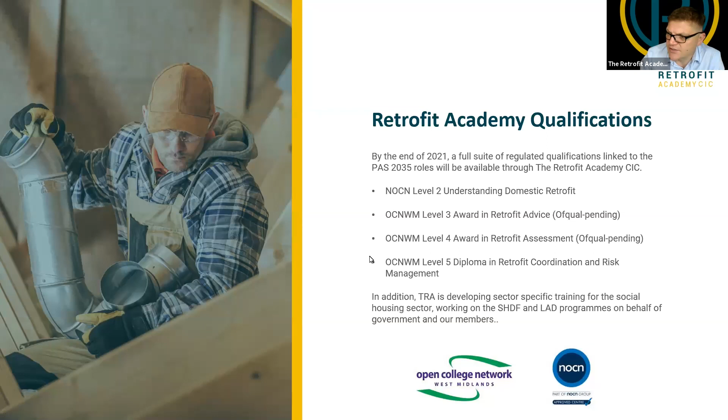So a lot more training. In addition to that, we're working very closely with the SHDF and LADS programs, doing some very interesting projects on behalf of both government and industry. So lots and lots going on.

In terms of funding opportunities at the minute, I'm hoping to have some big news in the next week or so. Our friends in government have been a little slow on something called the Community Renewal Fund, which we've had provisional approval on, but we're waiting for the Chancellor's green light in next Wednesday's autumn statement. I hope to have some really big news following on from that.

Until then, the funding we have available is in Manchester - funding from the Greater Manchester Combined Authority, but the funding restrictions are fairly loose on this one. If you're based in the Manchester area, you'll be fine. If you've been involved in projects in Manchester in the last few years, you're likely to be fine. If your company has an office in the Greater Manchester area, you'll be fine. So it's fairly open.

We've got £600,000 available through to the end of July next year to get people through those qualifications I showed you previously - all of those. The application window is open for that. Limited numbers, obviously, so we'd really encourage you to take advantage of that if you possibly can.

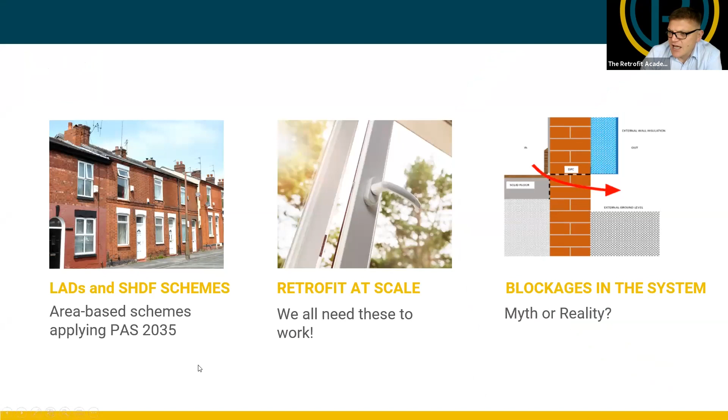I think they're all here. I'm quite sure about Colin. I'll keep my fingers crossed. And it's some familiar names to you, I'm sure.

In terms of our panel, we have Peter Rickaby, Colin King and Phil Mason, people you'll know well by now. And also we've invited Alice Monty from Engie, or it might be EQUANS now actually, forgive me Alice, and Derek Horrocks from Permarock and SBS to talk about the challenges they've faced on some particular SHDF and LADS projects. We'll see if our panel is able to answer all the questions that are essentially holding up those projects or limiting their potential. That's the main focus of today.

We're going to hear firstly though from Kate Duffy, who is the head of policy on LADS at BEIS, and I believe HUG as well, the Home Upgrade Grant. We've asked Kate to whet our appetite for LADS, because there are big numbers and big ambitions around this policy. So if we're going to unblock all the blockages, we first want to understand what the prize is and what the opportunities are. So Kate, if you are able to share your screen and take over from me, that would be great.

Yeah, or it's actually being told that it's disabled, so that might be a problem. Okay, you might have to allow me to share my screen. But while we do that, maybe I'll just quickly introduce myself. So yeah, I'm Kate Duffy, I'm the head of policy for the local authority delivery scheme across all the phases. I'm not actually the head of policy for the Home Upgrade Grant, that's my colleague James Kerry, who is not able to join us today. But I'm going to hopefully talk through all of the kind of noise that might be in the press recently, because obviously there's been a couple of big strategies published, and if we can't get the slides up, it's not really a problem, I'll just talk through kind of what we've had and then I can share them around after. Okay, you should be fine now. If you just try again. Let's have a go.

You might have been lucky to escape death by PowerPoint, but are we? Yeah, we're fine, that's great. Thank you, we're fine. Okay, I was about to have to fill there, but we could have done it. So firstly, yeah, thank you for having me. I'm not a technical expert, I've kind of been around policy for quite a while, so I like to come in and listen to some of the real life solutions. So firstly, just thanks for having me, and I'm really interested to see the case studies. So I've already introduced myself, so we can move on from there.

So as I said, there's absolutely loads happening in the net zero space at the moment, and over the last week we've had two major strategies published, which was the net zero strategy and the heat and buildings strategy. And it really takes us back to what we're trying to do, the eyes on the prize kind of situation here. So I just wanted to remind us of what the challenge is and what we're trying to do for these big government capital schemes, and also there's the bill payer scheme for ECO, but focusing today more on the capital schemes.

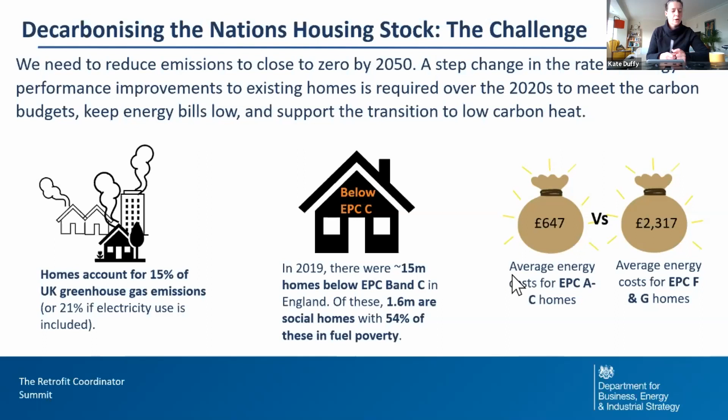So just recalibrating where we're starting from there. You've probably seen in the news there's been lots going on this week. We've had the net zero strategy that was launched, I think on the 18th, but the days have blurred into one. So I just wanted to pick out a couple of things coming through there.

There's obviously a key ambition that no new gas boilers are going to be sold after 2035. So we're really having to push to get ready for regulation. A lot of the capital schemes and the new boiler upgrade scheme coming in are to help the cost reduction for creating a market for regulation as well. So at the moment we're giving money and priming the pump of all these different measures in energy efficiency and low carbon heating, but regulations will follow. This isn't a flash in the pan with capital schemes - there are things coming up in the future.

We're also looking at how we stop being so reliant on fossil fuels. We're seeing this winter that the price increases are really hitting households hard. We need to think how we can make sure we're smoothing peaks and troughs on the grid, but also reducing our reliance on fossil fuels, which will help protect us from price fluctuations. Sorry, I can't speak today, it's been a long week.

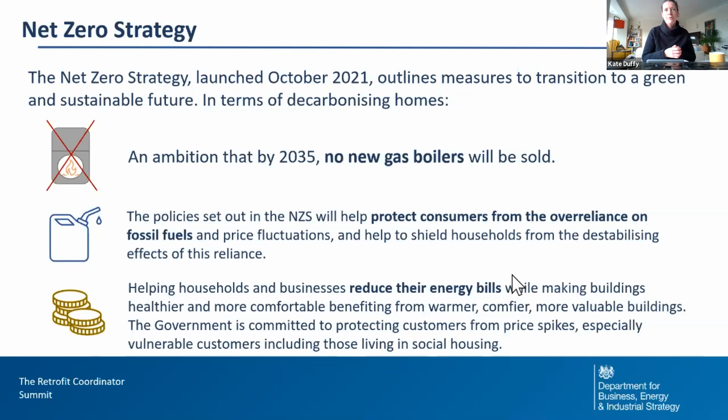So lastly on that, I've mentioned about reducing energy bills. Never forget it's around helping people out of fuel poverty, but not just the costs and being warmer - healthier, reducing pressure on the NHS. There's a whole myriad of things that come through from making people's homes more efficient.

On the same day we also launched the heat and building strategy. This is more focused and becomes part of our whole net zero strategy. It's more focused on retrofit and helping domestic properties come up. I won't go into lots of detail - there's lots in this slide pack, but I'll send it around after if you want to read about the wider context of what's happening.

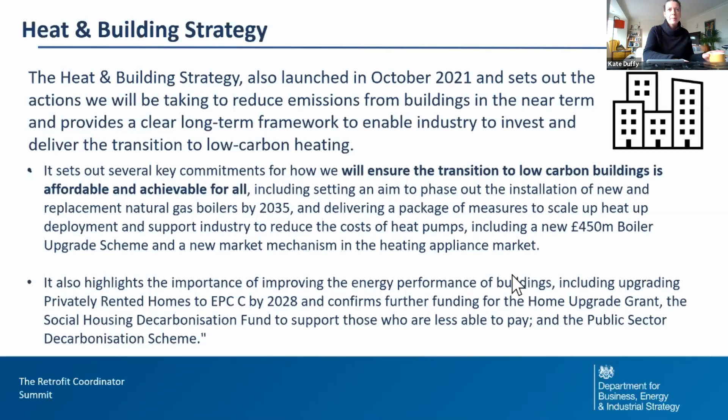So just going into some of the response - I work on LAD. Historically I worked on the energy company obligation as well. That's a scheme funded by energy bill payers, as well as the local authority delivery scheme, the home upgrade grant scheme, and the social housing decarbonisation fund - lots of long names - all funded through capital. That's from Treasury, taxpayer money, whereas ECO is an obligation on energy suppliers funded through energy bills.

As a package of measures, they're all trying to capture different segments of the market. ECO tends to capture the lower, easier homes, so energy suppliers can go in and do mass delivery to meet legal obligations at the best price possible. With local authority delivery, we're really trying to build up the supply chain in local areas - not just for retrofit, but building capability and capacity in local authorities to understand their housing stock. It's the same for the home upgrade grant, but that focuses just on off-gas homes, which historically have been very hard for us to treat through things like ECO. I'm not going into detail on social housing today, but it's important to mention - it's quite a big chunk of cash coming over the next 10 years.

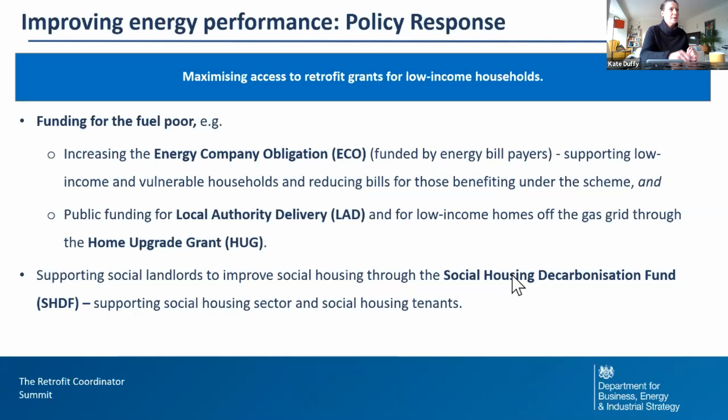So as I said, I am leading up the local authority delivery scheme. I work on the policy side, so I have pulled my delivery colleagues to give me the correct numbers, so I have to be careful that I don't just make things up on the spot.

This was 500 million originally that went out through two phases. Phase one was 200 million, and that's brought in over 136 local authorities. So big consortia bids that have brought in loads of people to work together to spread the regional distribution of measures. And then 300 million going through the local energy hubs, and that's brought in almost every, if not all, local authority in England. That's really helped to bring local authorities in that had no experience of this in the past.

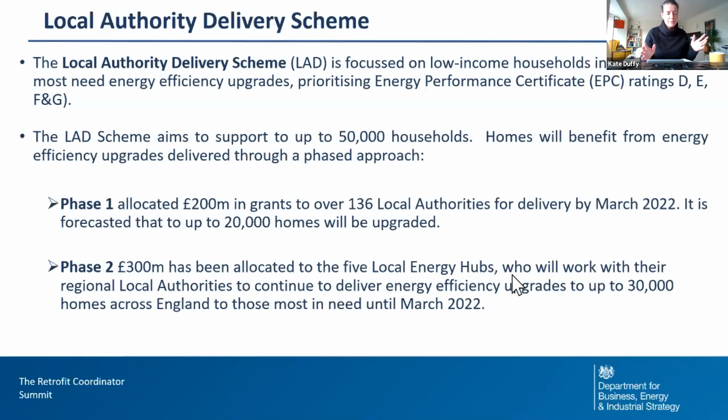So we had LAD phase one, which was actually split into two phases. Phase 1A has actually come to an end, and we're doing close down on that. But what we have tried to do is mitigate things just being cut off mid-project. So where local authorities haven't quite finished delivery, they've been given recovery plans to make sure that any homes that are in the pipeline and already identified can be finished. So we're not wasting money on surveys that aren't being used, and we're not wasting money on contracts that can't be finalised. We're just wrapping that up as nicely as possible.

LAD's phase 1B and phase 2 have actually now been extended all the way out to March 22. Aware that does go over the winter period, but it does give us another couple of months to do some of the larger measures, so EWI and heat pumps, but also over the winter, simpler measures like loft insulation and cavity can carry on, regardless of whether it goes under our magical 4 degrees.

So underneath all of those things, we've got the new sustainable warmth competition that was launched in the summer. We're currently doing our final allocations. We're getting that all through Treasury, and we're hoping to get money out to local authorities in January. We expect delivery then to pick up in March. So we're hoping there's a taper off between phases 1B and 2 to pick up delivery in sustainable warmth. And because obviously you need time to get contracts in place, that January to March time should lead nicely into delivery.

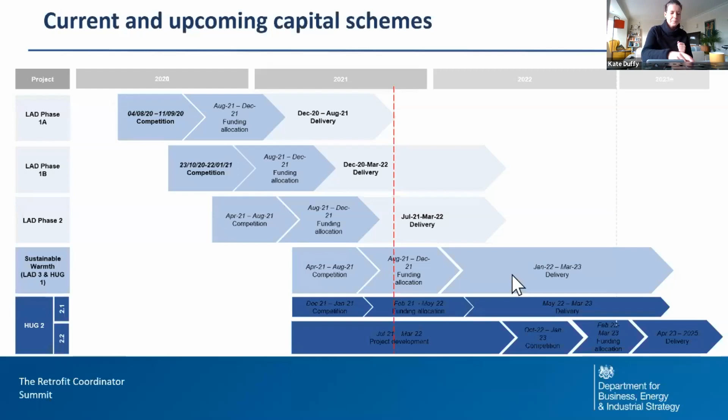I'm aware of the time and I've got quite a bit to get through, so I might skip some and stop so we can get to the meaty stuff in the presentation.

Just a quick update on what's actually happening in delivery. So in phase 1, there's a really strong push to identify households, and we had almost 18,000 households which were identified and found to be eligible. So that's checking things around the income eligibility and the EPC of the home. From that, we've had almost 8,000 measures delivered in over 6,000 households.

What we have found, and really good learning from phase 1A, which those of us that have been around for a while know, is that these things don't happen quickly. We've learnt that originally when phase 1 was set up, it had a very short delivery window. That has now been extended all the way out. And hopefully for future schemes, now we're moving out of single year spending reviews, we can have longer delivery windows. But the key thing that we took away from this is that there are households out there that are really keen to get measures in their homes, but we just have to make sure we've got enough time to go out and install multiple measures and bring those homes up.

So phase 2, the hubs have confirmed that they've got almost 100% coverage across their regions. I think the minimum we've got is around 85%. And where we haven't got local authorities coming in through the hubs, it's normally because they're doing it themselves. So we do think that across the whole of England, local authorities really grabbed onto this opportunity and moved forward. So like I said, that's over 300 local authorities working on that.

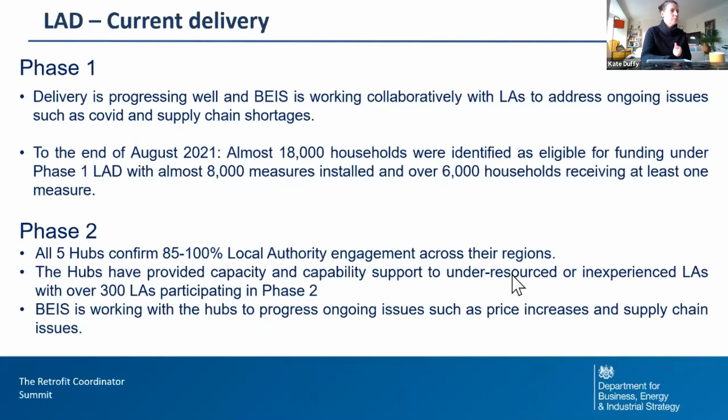It's really important, I think, as government, we can quite often come and say, oh isn't this fabulous, you've got lots of money, and we don't often talk about some of the actual delivery risks, and we can shy away from some of the negative stuff.

So one of the big risks for us as policymakers was that local authorities weren't able to deliver their target number of homes. I think the risk about this is around reputation. We've obviously had some issues around the Green Homes Grant voucher scheme, and when a scheme is seen as a failure or it's not meeting targets, that can have a big knock-on effect for future policy and how households and industry engage in that.

So what we have done already, I've talked about extensions to the scheme. I think that's probably the biggest thing that we could have done. But we're also assessing lots of different winter scenarios, everything from as it is now through to lockdowns, God forbid, a bad flu season, anything that might actually constrain delivery even further, and thinking about how we can maximise delivery in each of these different scenarios. We're working through that as quickly as possible.

Talking around that, COVID really did restrict the scheme in the first few months, and I think that's why we saw quite a slow start to the scheme. If you think about when this was all kicked off, we were in the peak, one of the first peaks of COVID, so people didn't want people in their homes. So we're trying to make sure we're monitoring those cases and feeding it into all of our scenarios.

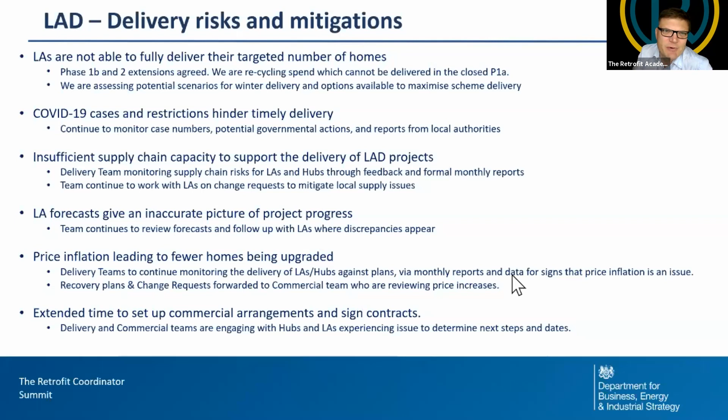Yeah, so I think this is really related to what I was just talking about on the risks and mitigations. And because we've now had lots of phases, so we started with phase 1A, phase 1B, phase 2, sustainable warmth, it's about, instead of just doing the same thing over and over again, how are we able to tweak those phases to actually help the market to deliver?

So one of the key things is the winter period, it's fast approaching. It's not been the best summer as well, so we've probably not had the most delivery of those key measures, such as EWI and heat pumps, that we would have wanted.

So as we're going into that, we're doing some early modelling of how we're going to deal with that. I talked a bit about supply chain constraints. You'll all be aware, external wall is one of them.

We talked about heat pumps, but I think there are also things we hadn't quite considered. We've been talking to a lot of suppliers, installers and local authorities in the scheme, and there's lots of people asking for heat pumps, really keen. They might have seen adverts, or heard their friends talking about it.

But actually, when you get into urban areas, having enough space next to a building, or the controls around noise, has really stopped a lot of delivery in areas where people are keen. So there are real technical issues we're trying to grapple with as we roll out these schemes. If we find a load of areas where they thought they had loads of people wanting heat pumps, but physically it's not possible, how do we rebalance and find new homes quickly enough to deliver measures in suitable homes? Because, as retrofit coordinators know, you've got to put the right measure in the right house, and we have to be really careful we're not forcing measures into situations where they don't work.

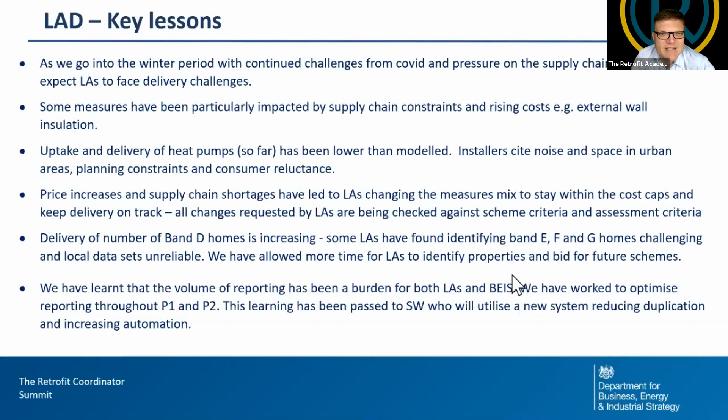Now, as I mentioned earlier, we were asked to organise this event really off the back of the blockages in the system that were coming to light, and we found ourselves talking mainly around issues around the insulation below ground, so below the DPC.

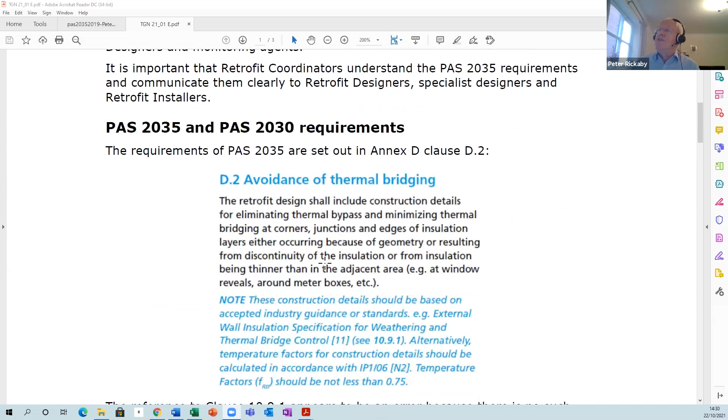So what this guide sets out to do is explain that. It sets out the PAS 2035 and PAS 2030 requirements, which are basically the same. It says in Annex D that you shall include construction details that eliminate thermal bypass and minimize thermal bridging at corners, junctions, edges, and edges of insulation layers.

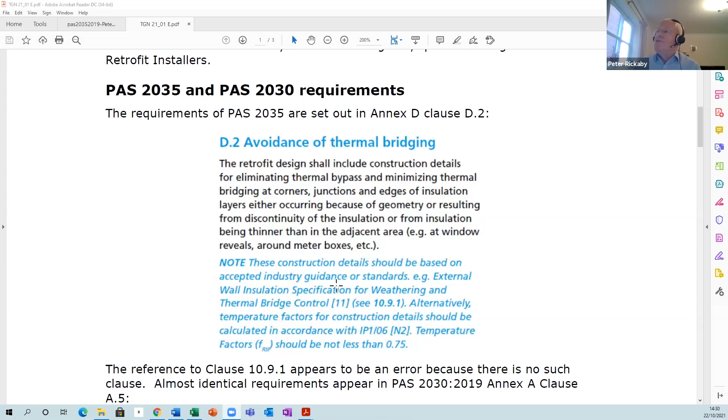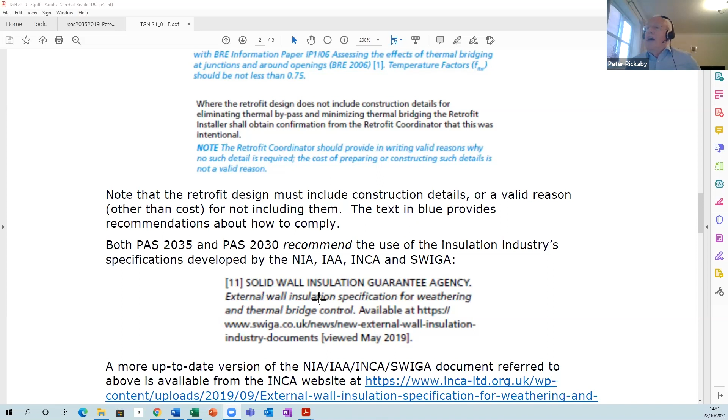And it points, in respect of external wall insulation, at the online best practice guidance put together some time ago by NIA, IAA, INCA, and SWIGA. That was put together between the publication of PAS 2030 2017 and the publication of the current two PASs, but it's still the best practice guidance. Both PASs recommend the use of that guidance, and that's where going down below DPC level and below ground comes from.

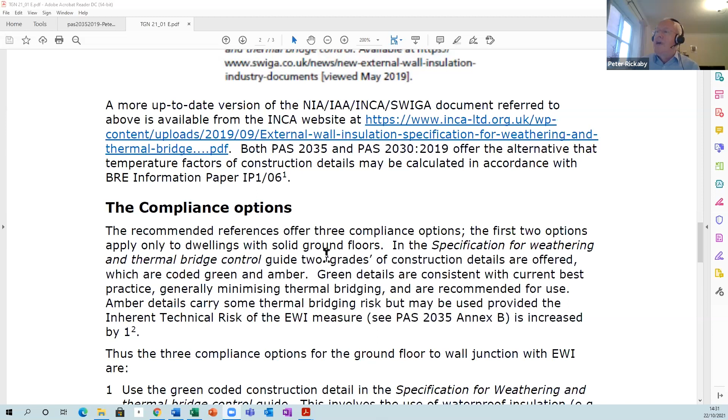If you look at that guidance, you find there are two compliance options in those best practice details, and another one in the PASs. Before we go into them, I should point out that in the SWIGA, INCA, NIA, IAA details, there are two grades of details, graded with colored blobs, green and yellow.

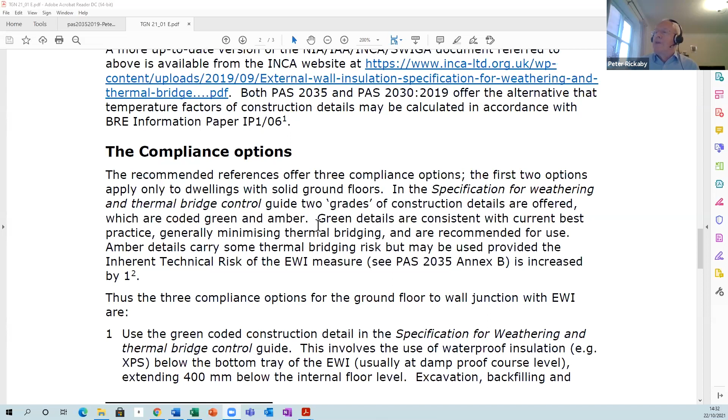Green are the best practice details, which don't involve any thermal bridges or very minimal. The yellows are a little less robust - they do have a bit of thermal bridging, but they're still pretty good. There were originally a set of red details, full of thermal bridges, which Colin King, Hunter Danskin and I combed out at the time of consultation. It was in fact a condition of the PASs pointing at them that the red details were removed.

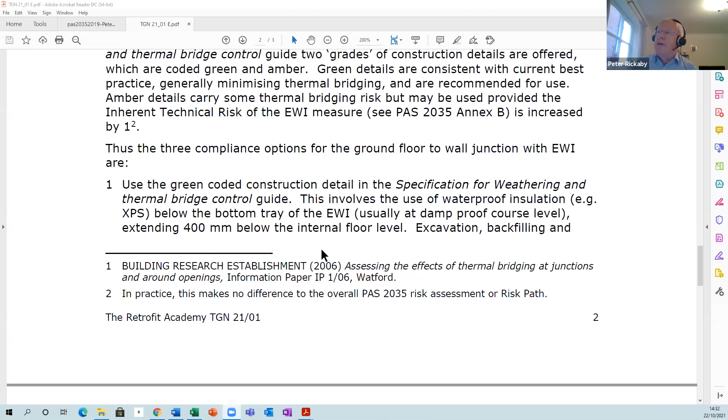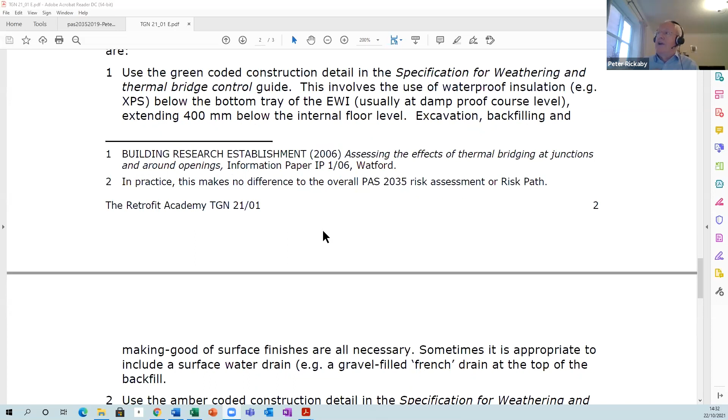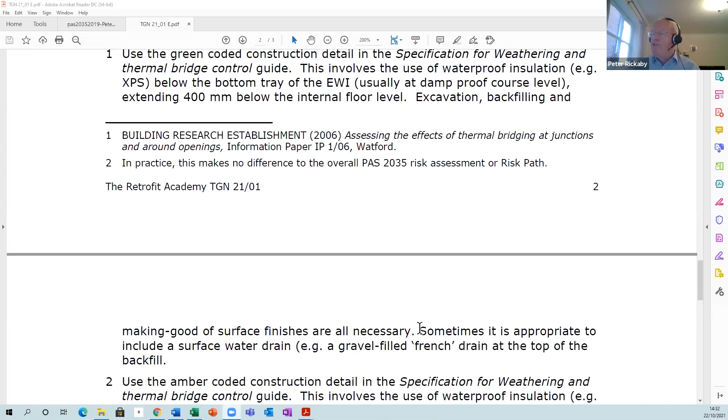So the three options in the PASs are effectively these. Number one: use the green coded construction detail from the online best practice details - that involves using waterproof insulation, usually XPS, below the bottom tray of the EWI, from dampproof course downwards, going to 400mm below the internal floor level. That will involve excavation, backfilling, making good of the surface finishes, and so on - a complicated process involving trades which EWI installers don't necessarily have on their books, more expense and more disruption, and sometimes it's just not possible.

The second option is to use the yellow or amber coded construction details in the same set, using waterproof insulation again below the bottom tray of the EWI, but down only to ground level. The only condition PAS 2035 puts on that is if you use the amber or yellow detail, you accept an increase of 1 in the inherent technical risk of the EWI measure in the PAS 2035 Annex B risk assessment. If you look at that, increasing the technical risk by 1 will not change the risk path - it will most likely be path B anyway.

And it's not going to push you into the next risk path, so the implications are very small. In many cases, if you're using an industry quality assurance scheme such as the SWIGA one, you're getting a reduction in the inherent technical risk of 1 as another concession offered by the PAS. So you end up where you started.

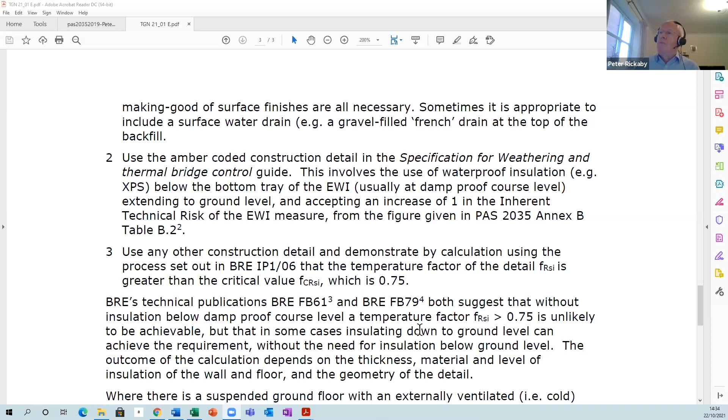Then the backstop, option 3 for this detail, is to calculate a thing called the temperature factor, which is a measure of the relative temperature of the inside of the detail, the inside surface, compared with the temperature of the surrounding room surfaces. There's a process for doing that, which is in BRE's Information Paper 1/06. That gives you a feel for how long it's been around, since 2006.

What it says in there, well what the PASs say, is that you should calculate the temperature factor in accordance with the BRE IP1/06 process and show that it's not less than 0.75. It has to be 0.75 or more. That is deemed by BRE to be the critical temperature factor, below which there is a high risk of surface condensation and mold growth.

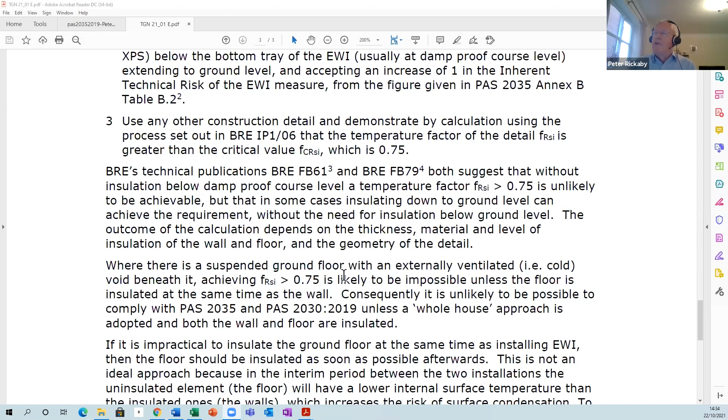Now, BRE has produced a couple of publications that show that actually you can get the temperature factor above 0.75 with insulation going down to the ground and not going underground. So there's plenty of options there. They've got some examples in those 2 papers on the screen now, FB61 and FB79, which show how you can do it. So that's another way around the problem of digging down.

But the outcome of the calculation depends on the thickness and materials used, the thicknesses of the wall and the floor, the level of insulation on the wall, and so on. So it will quite often be the case that we have to calculate the temperature factors. This process has been published since 2006, and included in the PASs since PAS 2030:2017. So there's no excuse for a competent EWI installer or designer for not being able to calculate temperature factors. It's part of the job, part of the required competence.

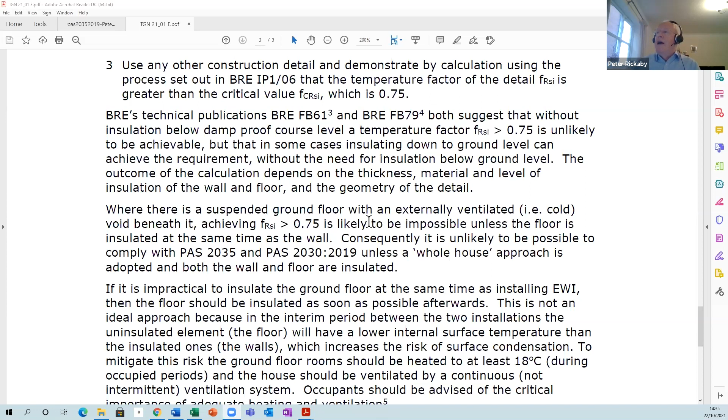There is a complication though, which is that when you get a suspended ground floor with an externally ventilated cold void beneath it, then achieving a temperature factor more than 0.75 is almost impossible unless the floor is insulated at the same time as the wall. The consequence is it's unlikely to be possible to comply with the 2 PASs unless you take a whole house approach and insulate both the wall and the floor at the same time.

Now that's clearly another barrier. Very often the LADs, that Kate was talking about, won't extend to funding both elements, even though that's what PAS 2035 is driving us to do — whole house retrofit, joined up at the corners, junctions and edges. So in the guidance, we've basically adopted the same approach that was used in the IWI guidance that some of you will have seen.

If it's impractical to insulate the ground floor at the same time as installing the EWI, then you should be planning to insulate the floor as soon as possible afterwards. It's not an ideal approach, because in the interim period between the 2 installations, the uninsulated element, which will be the floor, will have a lower internal surface temperature than the insulated walls, and that increases the risk of surface condensation.

So the mitigation for that risk in the interim period between the 2 elements being insulated is to ensure that the ground floor rooms are heated to at least 18 degrees during occupied periods, and the house should be ventilated by a continuous ventilation system, not an intermittent one.

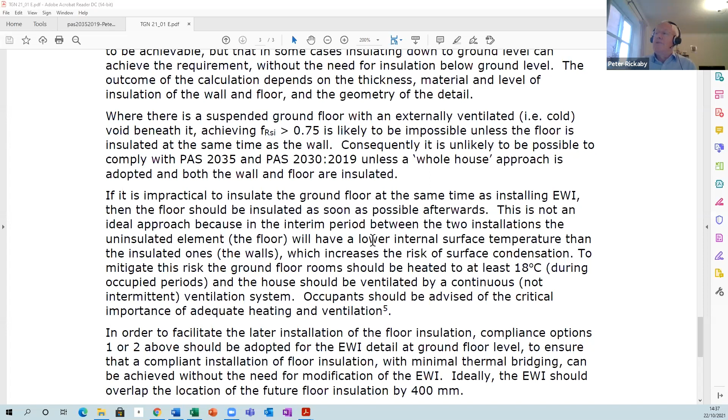And then there's a final point — clearly what you would do is put the insulation of the second element, the floor, high up on your program of work, not necessarily into stage 2 of the medium-term improvement plan, because that might be years away. It should be as soon as possible, as it says in the guide. And finally, if you're going to insulate the walls with EWI and not insulate the floor until you can afford to do so, or until you're able to, then it is necessary to facilitate the later installation of the floor insulation.

The way to do that is to ensure that when the floor insulation is installed in the plane of the suspended floor, or immediately above or below it, there is a good connection or overlap with the wall insulation. That takes us back to compliance options 1 or 2 from the insulation industry best practice details - either take the EWI down below ground level, or use option 2 and go down to just ground level. That will create sufficient overlap with the space where the floor insulation will be in future, and it will have to be done as part of the net zero program to get a compliant installation where both elements are insulated and the connection does not have a significant thermal bridge in it.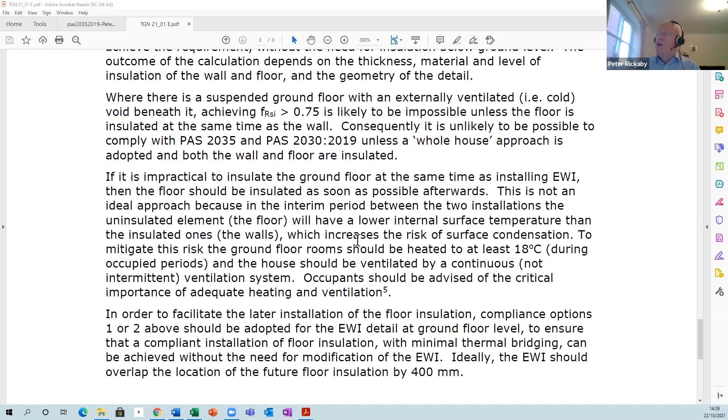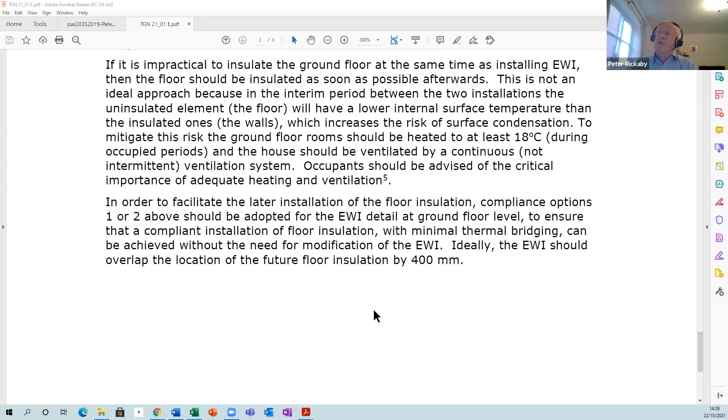So ideally, we're looking at overlapping the location of the future floor by 400 millimeters. Essentially, there are lots of options. One of the reasons we think the confusion and some of the complaints sent to BEIS have arisen is that people haven't looked at all the options.

No, we're not taking questions at the minute, I'm afraid.

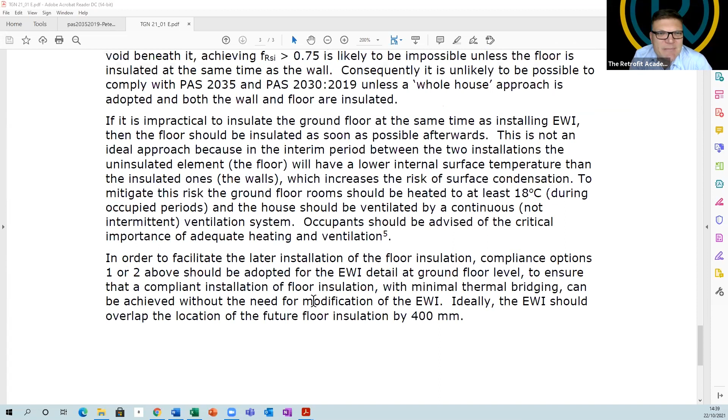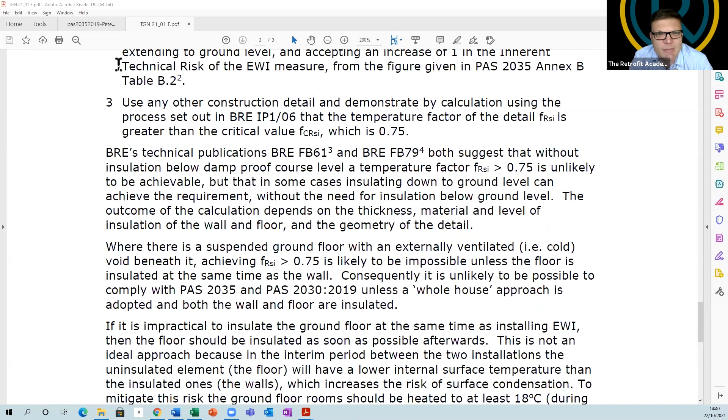We're going to have a much more informed discussion later on, but just for clarification, you're saying that guidance is approved by the Academy, by Trustmark, by BEIS, and by SWIGA - is that correct? Yes, except it does make the point that if you insulate the walls and not the floor, it's technically not compliant with PAS 2035 or PAS 2030. So what's suggested as the workaround is technically not compliant, and I know Phil at Trustmark will have something to say about that, but they're taking a view - we've offered it as a workaround, and it has been approved by SWIGA and by BEIS. I was talking to Ruth Richmond and Hunter Danskin only yesterday afternoon about it, and I think we're all happy that that's the way forward.

The final thing to say, slightly naughty of me, is that the forthcoming amendment to PAS 2035, not yet published, looks as though it's going to go the same direction - it's going to soften the requirement to allow that kind of approach with improved heating and ventilation in the interim. I think there was a yes at the start of that, though, so it has been agreed between those organisations, with some bells and whistles.

If I could just introduce Andrew Champ from SWIGA, who I probably neglected to welcome at the start, apologies Andrew. There are questions in the chat that we've discussed at length over the last couple of weeks around whether there are guarantees available for insulation systems below ground, so perhaps you could update us on the real situation there, please.

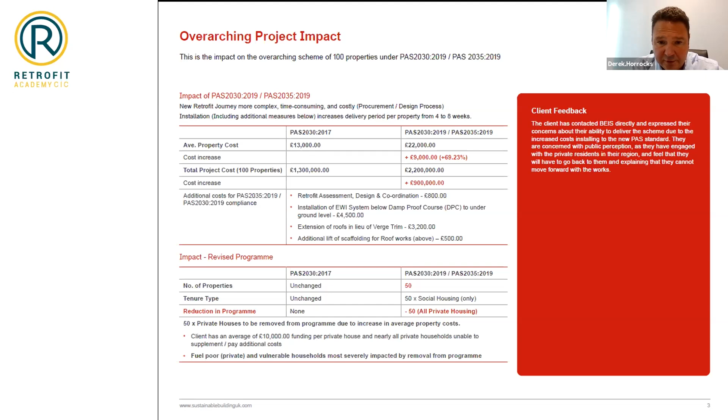We've been quoted 12 weeks for the roof tiles, which just completely throws it out. It's impossible in a timescale to do it. There's obviously party wall issues with both neighbouring properties, and again, to get them sorted out would make it practically impossible to extend the roof line.

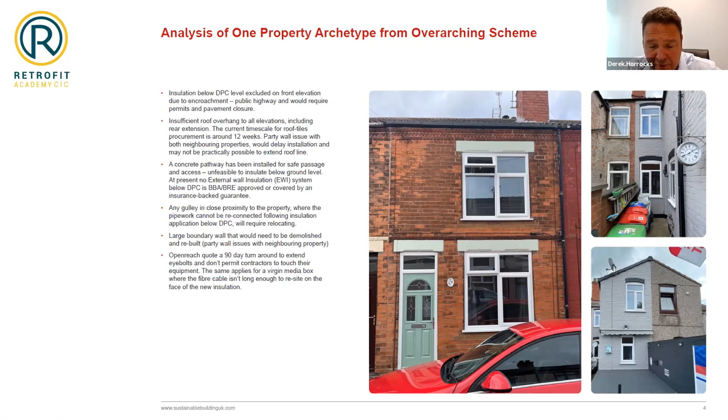And some comments there around BT and Openreach and their sort of issues. So that just brings it into a little bit of pictures and shows you a little bit about the practical side of it, in that sort of property. Taking that aside, that's what that property would cost extra.

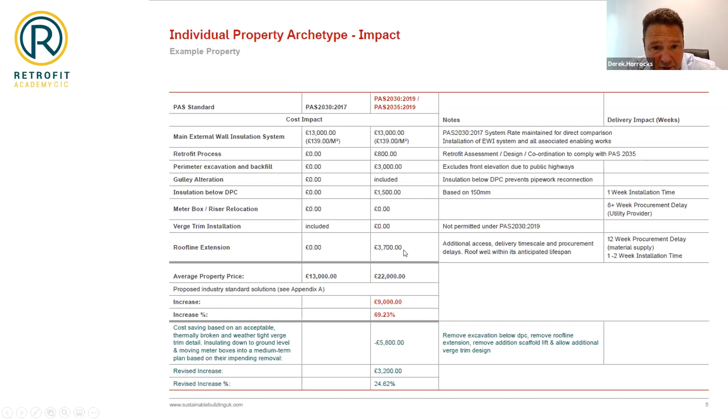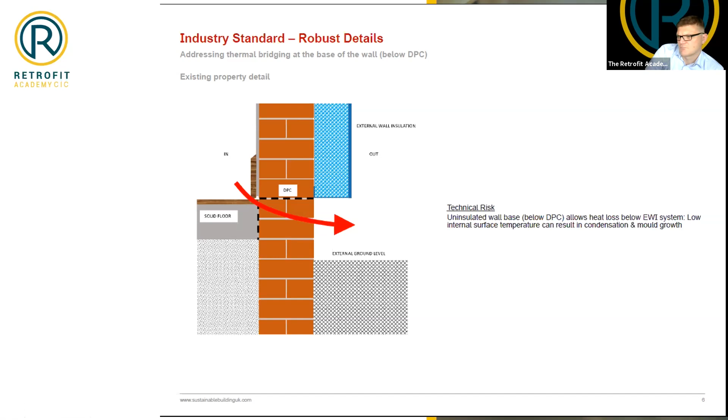So there's no need to go through them. I think we're now clear where we are below ground, and that helps a lot with these properties and what the issue is, so there's no need, I don't think, to go through these.

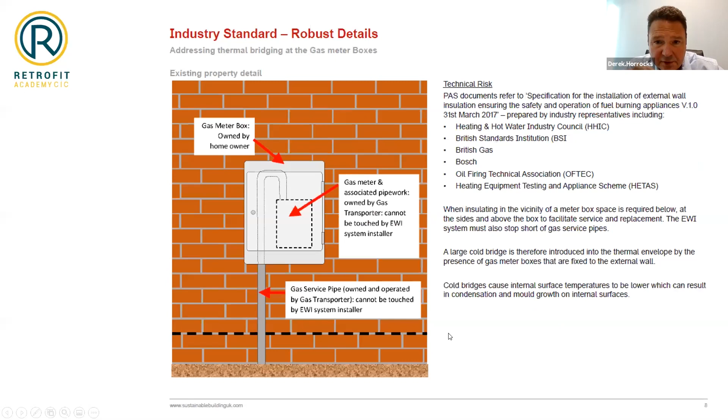Meter boxes - what we're saying really is that there is an option. Option one is they should be repositioned where possible. The main problem with repositioning is disruption time - getting utilities out to move them is now taking 6 to 8 weeks, even 12 weeks - so it's more of a practical problem than cost, but there is a cost to it. Since 2017 we've had a detail that can go round, and what we're suggesting is we continue with that detail and put meter boxes in the midterm plan. Then, as properties get replaced with other forms of low carbon heating, the boxes are taken out at that time. So that's just one possible way around that.

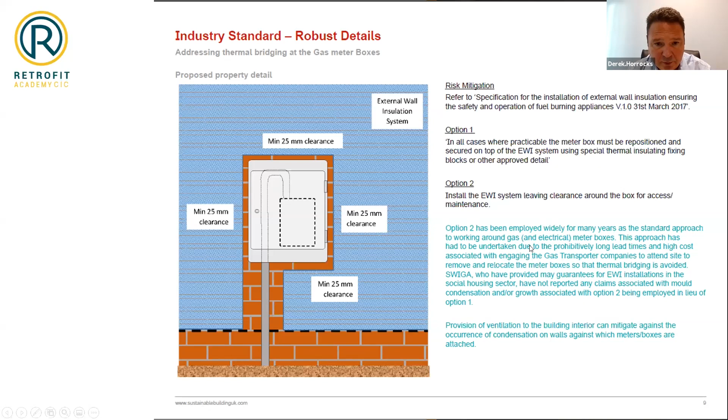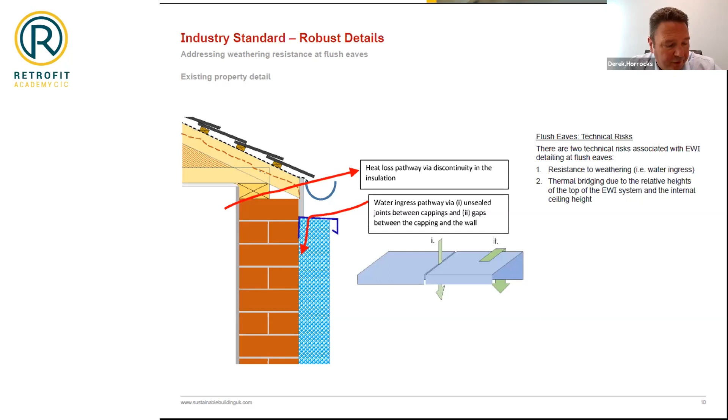And then coming on to verge trim details, that's slightly different - this is where Dr. Jeremy Richards was more involved, putting some solutions together for robust verge trims, which are currently not allowed under the PAS. We've got some quite detailed options that we've put forward as an industry to BSI and to everyone involved, to see if we can come up with solutions that are agreeable, alongside a training program that's quite robust for the fitting of these - giving a robust solution without the need for extending roof lines at every juncture.

Peter might want to tell us a little bit more about where we're up to on that, but I believe there's a plan in place to maybe road test these on some schemes, and see - make ourselves comfortable that they work in practice.

Yeah, okay. As I said, we met on Wednesday and reviewed this very detailed case study you put together. Perhaps Peter or Andrew might be best placed to respond on this one. I have my notes for the meeting too.

Well, shall I talk about the trims to start with, just because, Derek, you want to know where we are. Andrew and Jeremy brought the new improved trims - they're not just verge trims, they're eaves trims as well, as you can see on the screen at the moment - to the BSI Retrofit Standards Task Group a couple of weeks ago, and we liked them. The official position is that the PAS points at the insulation industry guides, and the insulation industry can change those guides at any time, however they want, so there's no restriction on that.

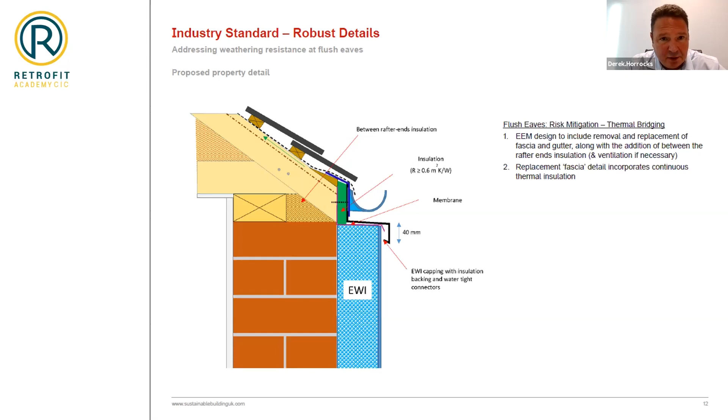The people that were in those houses won't be very happy that were having their houses done, and now they're not. But yeah, I think the best possible solution is being put in place to ensure that properties are retrofitted in the correct manner, and that the most people are benefiting from the government money that's been available.

And I think just on those householders not getting the measures, I think for this is that they're not getting it right now. But let's not waste all that surveying, all that good work that's been done to get them ready, and we'll put them on the back burner until they can get through. But yeah, I'm glad you feel that we are being reasonable and trying to allow different changes and measures.

Very much. Okay, one of the questions I'd like to ask, but it's the point for Derek. If you look at your extra costs, they're really in two categories. One is the extra cost of the details, whether they be the ground or the top, and we've talked about that. And the other is the extra cost of the process that comes with PAS 2035 - the assessment, the improvement option evaluation, the medium-term plan, the evaluation at the end, etc.

And actually, some of that stuff was in PAS 2030, 2017. At that time, you had to have a design, you had to have construction details and so on. So I'm not sure the comparison is actually apples to apples, it's apples and pears. I think it'd be really useful to try and unpick those numbers, to see exactly what's coming from the improved process to improve quality, and what's actually not a fair comparison because you were doing it anyway, but you've put it in as zero under 2030-17. So I'd just like to try and unpick that if we can.

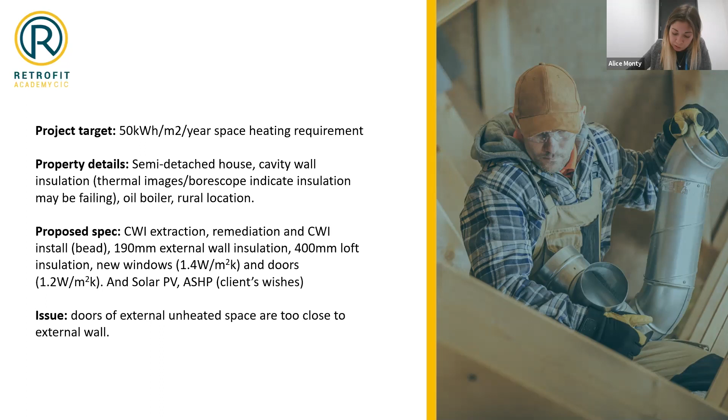As I mentioned, this is a risk path C, so we've got an architect on board as our retrofit designer effectively doing our drawings. We are doing a lot of the thermal calculations in-house as a retrofit coordinator, as we're SAP assessors and have had therm training, so we've been doing a lot of that. If you want to go on to the next slide.

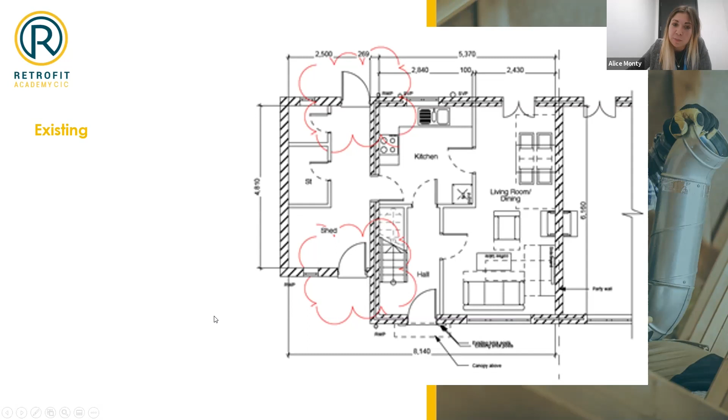So our issue, this is our building as it is existing. The extension on the side is a 1-story extension, and it's not heated space at all. There's also that wall being pointed on where we've got a boundary issue, so although it might be easier to insulate the whole way around the building envelope, effectively bringing it within the thermal envelope, we've got boundary issues that prevent that. So we're trying to insulate our heated space, our main property. If you go to the next bit, you can see our current issue, we've got doors really close to the wall on the extension, and it's messing up our continuation of insulation.

So we've tried to design around a chamfering detail. A lot of properties on our scheme have something around doors and windows where we'll have to look at chamfering as a solution. It doesn't look pretty, we know it doesn't look pretty, although these things don't look as bad in plan as in real life, and I have seen sites where the chamfering actually looks quite nice. One key concern with this and other chamfering details is that for thermal bridging, we need to get the surface temperature factor above 0.75. In cases where we've tried to minimize thermal bridging as much as possible, there are scenarios where the insulation drops off to nothing because of the door, and we have to maintain certain door widths as well, being social housing.

And yeah, so just wanted to hear some commentary around what the panel have to say. I know we've got some answers back, which is great, but yeah, some feedback on these kind of issues.

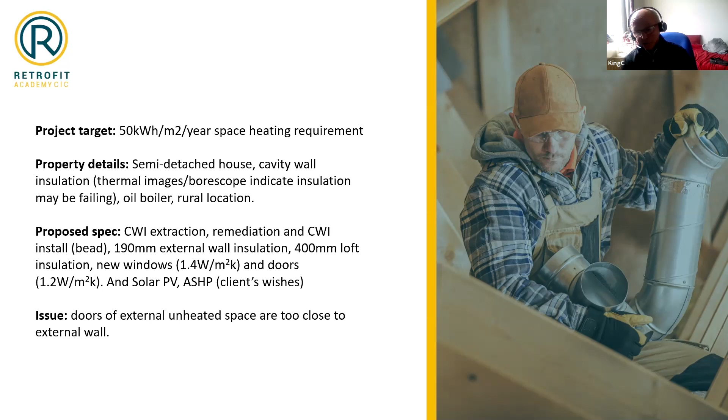But what I would suggest in that sort of situation is why use the same insulation? Why not use strategically placed higher performing insulation? You've got a semi heat loss area because it's sheltered. It's not an external wall. So when you actually look at the thermal bridging, you're not calculating the difference between an outside area and an inside area when you do those temperature factor calculations, because it's a sheltered space. So the U value isn't as bad. So there's no need to push that area of the building quite so hard.

All you've got to do is look at that one junction, and I'd be looking at doing something with a different material to actually improve that one corner if you can't move the door or re-hang it. In my mind, if you shifted the wall, if you shifted the door 100 mil over, you could just put the insulation on the wall. It's that cost balance between how much knocking about can you do, but it's not an external wall. It's a sheltered wall, and I'd look at doing some different material in that one corner to get that detail to work properly.

Yeah, actually, so just quickly, I'd actually take it to the end, because the way the systems work, you need to make sure you've got a clean line there. And, was it 190 mineral wool you're using? So there's a lambda value of, I don't know, 38, 39. And then you don't have to go to aerogel.

There are other products like PU and PI, providing this isn't a block of flats and you've got no issues with combustible materials. We do have a client requirement that we don't use - for example, we wouldn't be using mineral necessarily on the whole with the thickness. The 190 mil thickness is obviously causing us issues all over the place with thermal bridging, but it is actually a client requirement that we aren't to be using polystyrene even on the buildings at all.

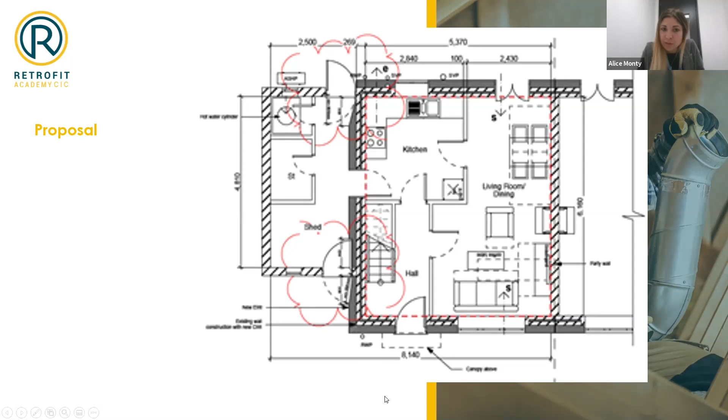Yeah, it's just the cost of the aerogel always frightens me. I was going to say 30 mil of aerogel across 4.8 meters - times how many houses? Yeah, this is why I suggested one of the others.

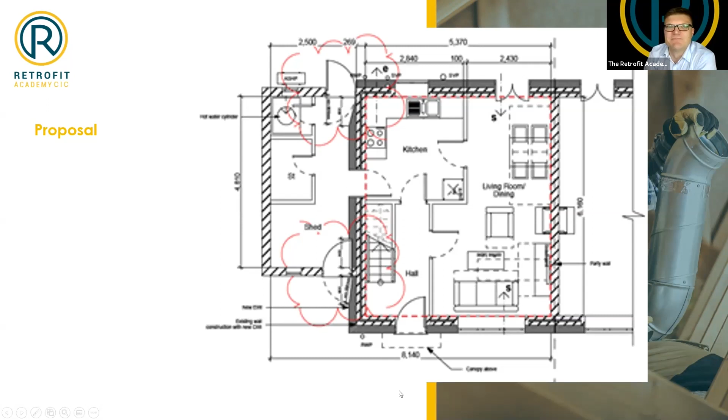So let's look at Derek's second case study. Over to you, Derek.

Yeah, again, it's just, yeah, sorry David, it's just slightly different. It's more of the same, just slightly different house types, different clients and a different way of viewing things. But in this instance, there's 160 houses under LAD 1B and 2. This is slightly different in this case because it's all social housing. So 80 houses have already been done under LAD 1B and under 2017, and now under 2019 we're looking at doing 80 houses, all social housing again, but all different archetypes.

Same thing. We'd like to have been halfway down through this project by now, using PAS 2030:2019, 2035, but it's just been taking time to get the right retrofit professionals in place, which we have, and getting the correct designs in place and all the rest of it.

But the client again is worried about obviously the extra costs. So yeah, thanks, David. Okay.

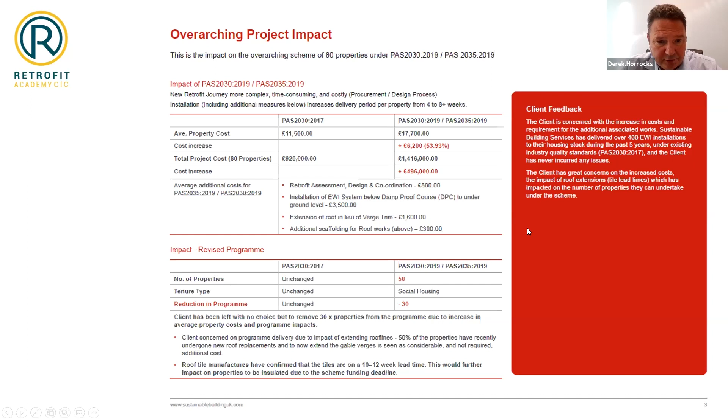Okay, so next one please, David. Yeah, so again, we're just going down an individual archetype - we'll come on to what it looks like. In this instance, the increase is £7,000, just by making some of the adjustments we've made - going to ground instead of below, using one of these robust verge detail, and moving the meter box into the medium-term plan is saving £4,000 of that £7,000. So it makes a big difference.

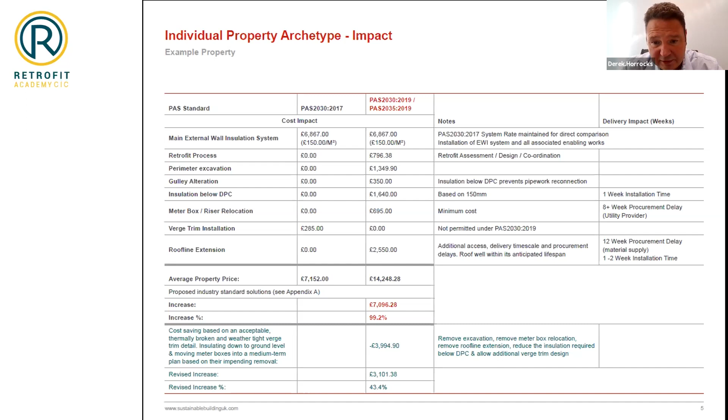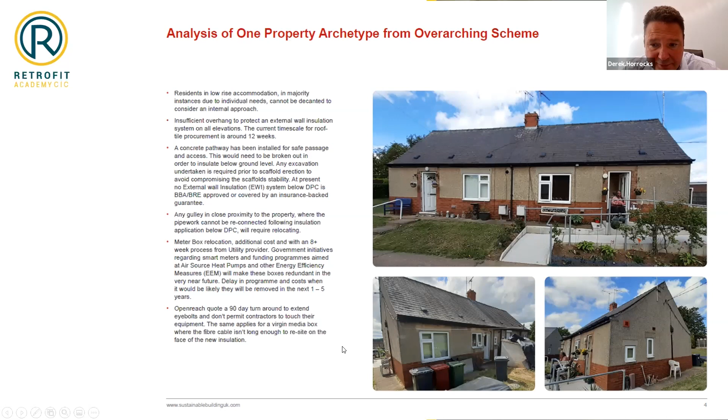Okay, next one. So this is just one of the archetypes, and again I find it useful if we can have a look at a picture - it just shows what we're talking about. So the residents obviously can't be decanted, so internal work is going to be quite difficult because it's quite small properties. You can see there's insufficient overhang to protect any external wall insulation system, and again, the roof tile procurement is around 12 weeks. A concrete pathway for safe passage and access would have to be broken out to insulate below ground level. Any excavation undertaken is required prior to scaffold erection to avoid compromising scaffold stability. And again, we've talked about the guarantee situation. Gullies would need to be relocated. Meter box, again, we've talked about that, same sort of an Openreach issue. And you can see in one of these there's also a disabled access ramp, which adds complications to the retrofit design that would have to be thought about. So yeah, thanks very much.

And really, it's just another example of the cost. I think what's important, and what impacts clients, is there's some big costs involved, and it frightens them. I think as the cost of a good retrofit develops, clients will get more used to what that cost looks like. They'll be expecting to do less houses, but do them to a higher standard, and that's got to develop over time. Well, yeah, that's a really good point.

There was a conversation in the panel the other day around what the expectation was around increasing costs as a result of changing the way we're doing things. So Phil Mason, you've been unusually quiet so far - I don't know if you're able to update us on that, or anyone else from the panel. Yeah, right, sorry, I was a bit short - can you just clarify the question a little bit before we get right, please?

Yeah, we had a conversation - well, look, if you don't feel you're the right person to answer it, anyone else on the panel can. But it was that we talked about the expectation of prices increasing as a result of doing things differently. You could look at it in terms of comparing delivery under PAS 2017 or PAS 2019, but it's just this step change in quality we're talking about, and the overall expectation of increased cost. So perhaps more from a Trustmark perspective than a personal one, I think that's exactly the direction we see things going, in terms of more retrofit to a different standard per dwelling, rather than the number of dwellings improved. Because one of the things going forward is taking dwellings to the levels they can possibly be taken to in one go, rather than repeat visits to the dwellings over a number of years.

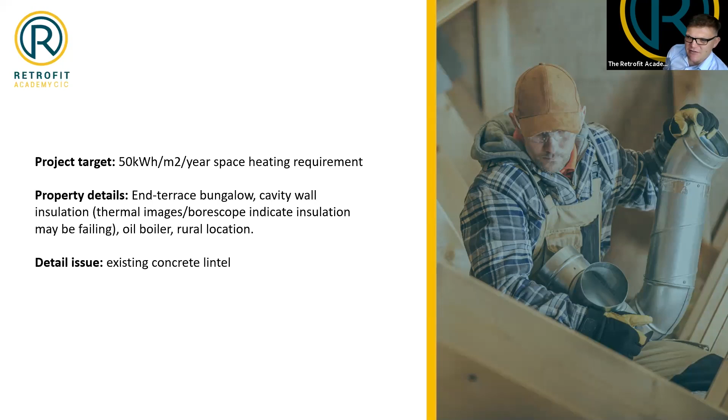Just before that, I just wanted to echo that we would have hoped to be really much further along with our projects as well, just as Derek has said, but the design stuff has taken time, the contract, the programming stuff, resourcing, sourcing products and everything has taken way too long, and it looks like it's going to be a big problem. And just to echo the fact that the time frames for these funding schemes, we think is far too restrictive at the moment. But yeah, just want to say that.

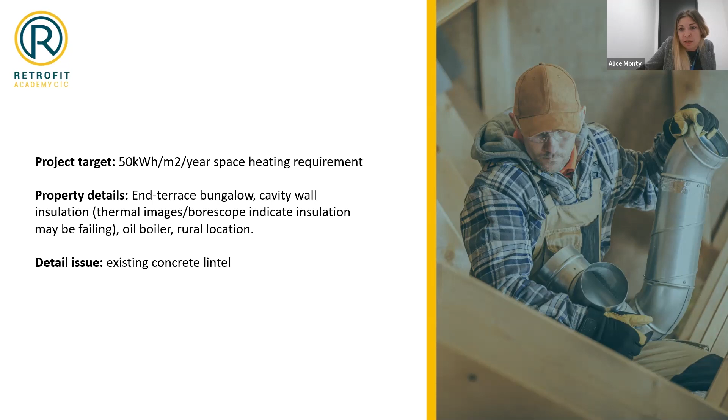Right, so final case study, it's the same project. It's an end terrace bungalow in this instance, so similar package of measures going in. If you want to go to the next slide, so the detail. Our issue is we've got an existing concrete lintel there. I don't know if you can hover over it. I can't. So you can see where it says existing concrete there.

What we're finding is the surface temperature factor when modelled in is 0.74, which, as we know, is just below the 0.75 allowable tolerance for surface temperature factors at the coldest point. We've tried to include some XPS here as the smallest amount we could have permissibly. I just wanted to see what you guys said as a potential solution, obviously trying to minimize costs. I'm trying to go back to our client and our operations teams, and they're looking at me saying, well, you're at 0.74, surely that's okay, because adding a load of cost to put something completely different there.

Now, in fairness to the panel, Alice, this is my fault, not yours. I presented this to them when it said the temperature factor was 0.76, not 0.74. So we had a totally different conversation than the one we need to have. You did email me in between and tell me there was a typo in it. But the key question remains, is there any tolerance, or should there be any tolerance from Trustmark or audit or anyone else where you're within 0.1 or 0.01 of that acceptable level, which we did discuss at length in the panel.

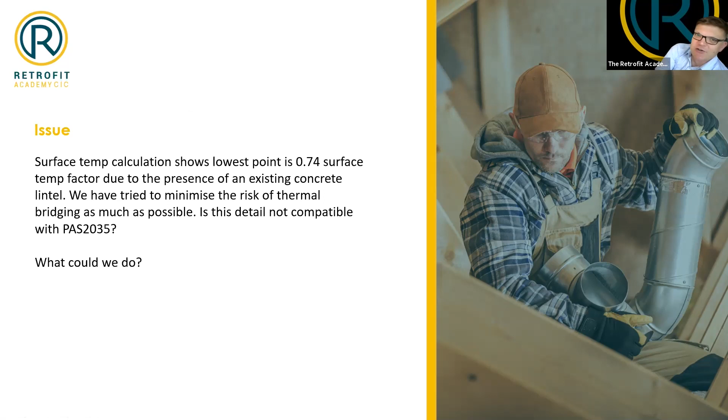So we welcome anyone from the panel to respond. Sorry, Peter, can I just take that one on the variation? Yeah, no, there is no fluctuation. A fail is a fail, whether it's by 0.01 or not. That 0.75 is an absolute calculation using the international standard. So no. And that was the conclusion of the panel as well, which Colin wasn't at, so we're all in agreement.

So what should we do about that detail? That seems to me to be an absolutely perfect example of where you use an aerogel. Those expensive high-performance insulations are for use where thinness is at a premium, so that's where you use them. Window reveals and underneath a lintel like that is where you would put your aerogel. You're using very small amounts of it, and trying to take a lesser performing material and just missing the temperature factor immediately says to me, find a slightly better performing material. You wouldn't need very much, and in fact, probably with aerogel, you'd get it thinner.

But I don't think you need to keep saying aerogel - there are other things in between, like XPS, which again is pretty poor thermally as a foam. Some of the more common foams that are readily available for significantly less money than aerogel would probably get you close to doing that anyway, I think.

No, I'm sorry, Andrew, I don't agree with you there. It's actually the enhanced lambda of the aerogel that gives you that benefit in those very small strategic areas.

You don't think phenolic could do it? Yeah, I've looked at phenolic, and it doesn't become very stable when you get down to very thin thicknesses. It can off-gas and cause all sorts of problems. It's okay if it's encased in something, but when you've only got a very small area like that, it's crying out for aerogel. Use it strategically in very tight spaces - it's the only stuff to use.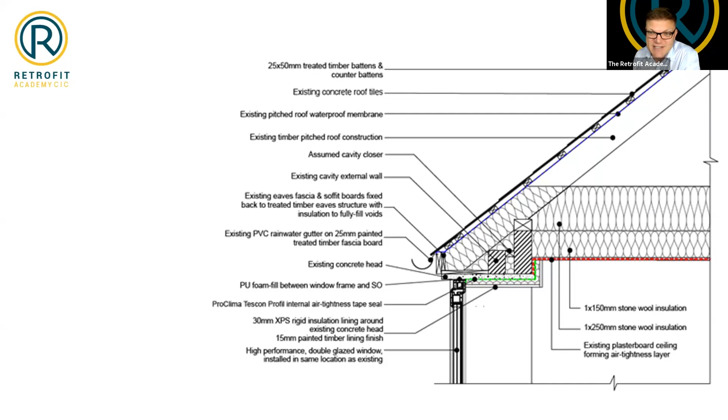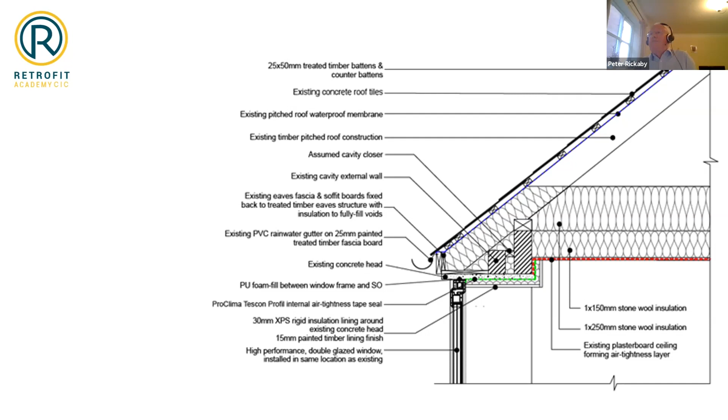I didn't understand the question, David. What do we need to do? What would need to happen to make it easier for everyone on the call to make the right decisions without the answer being every time we need to speak to Colin, Peter, or one of the other small number of people with all the knowledge? That's just about the industry gaining experience. Whenever you get new standards and they present new challenges, people find their way around it. Actually, one thing the building industry is very good at is finding solutions to problems introduced by new standards, whether it be building regs or PAS or whatever. They're very good at it.

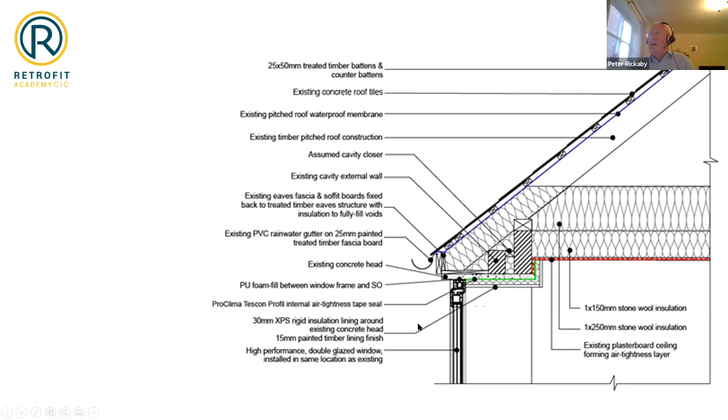So I would say it's just experience. We're at the point now where we're doing stuff in a new way, almost for the first time, and inevitably people are going to say, that's a bit difficult, I haven't thought about that, the normal product doesn't work there, the normal process doesn't work there. And we're finding out how to do it. It's like Andrew reacting to the verge trims problem by designing a better verge trim. That's what's going to happen. We've spent the last 10 years in retrofit trying to use new build materials, products and processes in retrofit, but we're slowly introducing things that are retrofit specific. And that's as a result of experiencing trying to do it properly. So I think it will happen, but it's just a case of having events like this to disseminate the lessons.

It's Andrew here, I agree. I think the other thing we've recognised is the standards have all been rewritten, so the training has all been rewritten. All the NOS has been rewritten for EWI, for all the practical trades. And there's actually an interface module now being developed. So the training was behind the times as well. So the people we're now bringing through will also be trained on interfaces specifically and cold bridging. So we're doing all the right things already. We don't need to do any more, just keep doing it, is that what we're saying?

Yeah, I think we have to keep running forward, meet the challenges, and think creatively and imaginatively about solutions at the level of the stuff that Alice has shown us, and at the level of the stuff that Derek's shown us, and at the level of processes. But what we don't want to do is retreat from it and say, okay, we're going to accept a decline in quality because we think it's too difficult, because that's just going backwards.

David, can I just? Yes, of course. I think what's happened in the last few weeks has been quite astounding, actually, by bringing together - we've all been instrumental in it - industry, BEIS, obviously the guarantee agencies, the associations, Colin, Peter, BSI, Trustmark, Retrofit Academy, and everyone together that has formed these solutions and got everyone on the same page, and that sort of little bit of lack of trust has been broken down. And actually everyone's worked to the same goal. And I think if we can continue to do that and then disseminate it through all the organizations, including doing lots of different events like this, like in the associations, within Trustmark and SWIGA etc., NIA. And I think this combined collaborative approach, we've achieved so much in 2 or 3 weeks. It's been quite incredible, and I'm loving the positivity.

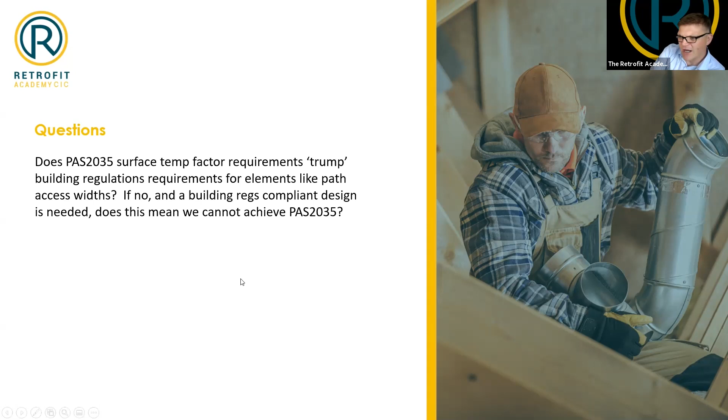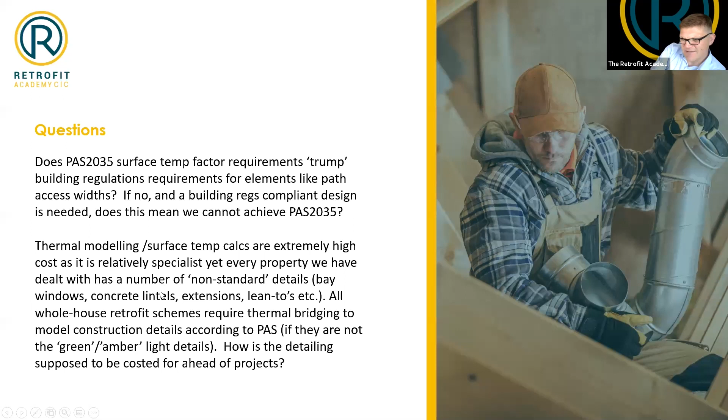There were a few questions submitted in advance. Now, I'm not going to necessarily put all of these to you, so certainly that first one I think has been answered. I'm going to skip through that, so I think there's some good questions in the chat as well.

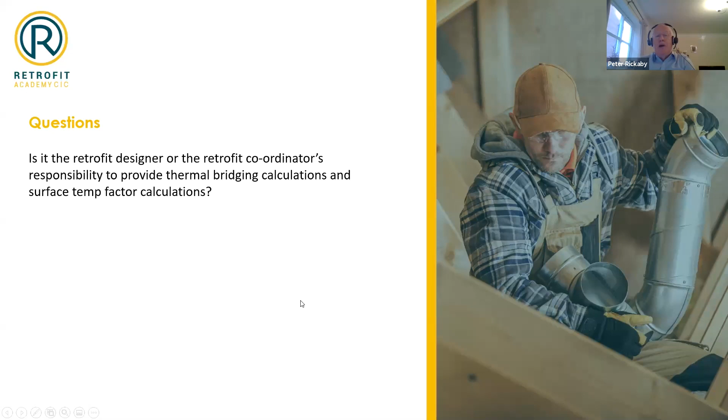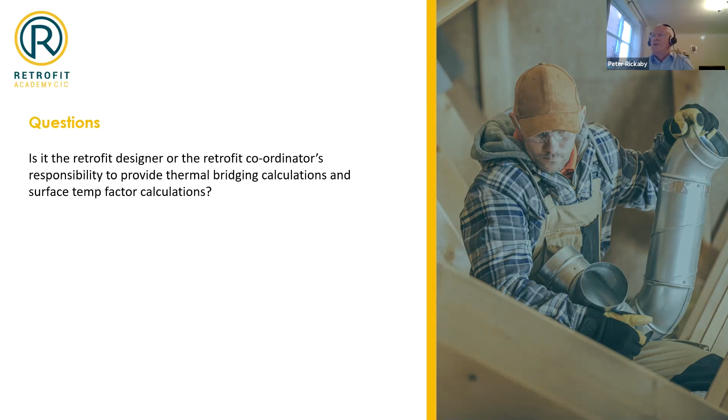Just a quick one I think we can answer here, around whose responsibility it is to do these surface temp factor calculations - I think that's probably best answered by Peter. So it's the retrofit designer's job to make sure that they're in place. They don't necessarily have to do them themselves, they might get somebody else to do the calcs, or a u-value modeler to do it. And if the retrofit designer is coordinating a specialist EWI design from an EWI supplier who is providing the details, then the supplier should be doing the calcs too. My view at the moment is that the competency of anyone professing to be a specialist designer of EWI should include doing those calcs. Okay, fantastic, that's nice and clear.

Service and meter boxes, I think we've covered. Just one thing on that - just this very morning I've been shown an overbox, an insulated overbox which goes over the meter, and the idea is that it changes the insulated envelope to outside the meter. It was a brilliant product, so I've sent them off to talk to Andrew about it. Oh, interesting, that might be an innovative product that will help with that problem. Sorry, what was its name?

I can't remember the name of the people, but it was called an overbox. They've invented it, and I did the temperature factor calculations for them, so it works.

Andy Merrin asked in the chat if we have an online forum where these types of problems and questions could be posted to gain advice from other experts. We don't quite. Andy Johnson, our Centre of Excellence manager, has raised that idea many times, and I think it's something we definitely want to do. It's a disappointingly expensive thing to do in this day and age, but I think it's something we must do, so we will put that in place.

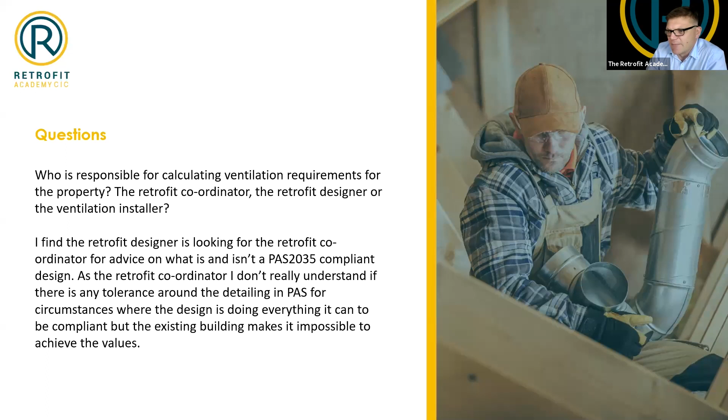There have been more comments in this chat than any meeting I think I've ever been in the last two years, so we'll flick through there and pull out some really good questions. But is there anyone who would like to come in and ask their question verbally to the panel? Perhaps you could just put your hand up so I'd know, and then I'll bring you in.

Don't all go shy on me now. Well, I got one. I'm not sure who that is, but go ahead. Jason. Jason, hi.

Is there anyone from the product sector there who wants to respond? Just quickly, it's Andrew. So I deal with the people on the product side, they're pretty much members of ours. In case nobody sticks their hand up, I know that people like Insta and others, Permarock, which Derek owns, are all looking at these things in detail.

So they already have plinth details, they already have verge trim details, they already have details for removing basic cold bridging - things like timber blocks where you fix downpipes. So all of these are already available. Things for robustly fitting the most common things like sky dishes, although Sky is now moving away from sky dishes, but all those sorts of things are already available. I think the issue is, back to Peter's point, they value engineer them out because we're trying to save money. But they are already available - each of the system holders have them. It's just getting them used.